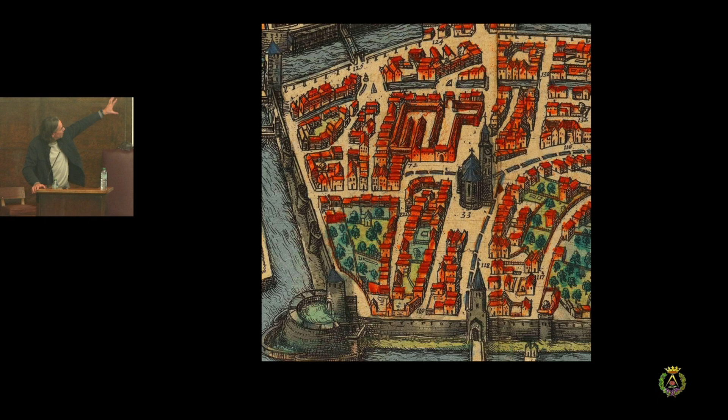Here's the plan, so it's a little like a village in the city, an urban village. You can see in old maps that it used to be there, really old. There's an irregular, organic, typical medieval city, and then suddenly this almost modernistic Siedlung in the middle. It was founded by Jacob Fugger, called the rich guy, sort of the Bill Gates from medieval times. He didn't have any children, but he was very devout Catholic, and so he said, okay, I want to invest and leave a legacy with the Fuggerei.

So the successors were not able to do anything with it, you could say. And now it houses about 150 people, a mix of some elderly and some younger people. They all have this effect, they need a little extra. Some people stay there a bit longer, but on average they live there 7 years, and then they either learn something or they get some help. It's remarkably great, you could say.

So this is the atmosphere. There's the mailman, and well, we were asked to look at it and make a pavilion, but we were also asked to find out if we could repeat it. And what would be the ingredients?

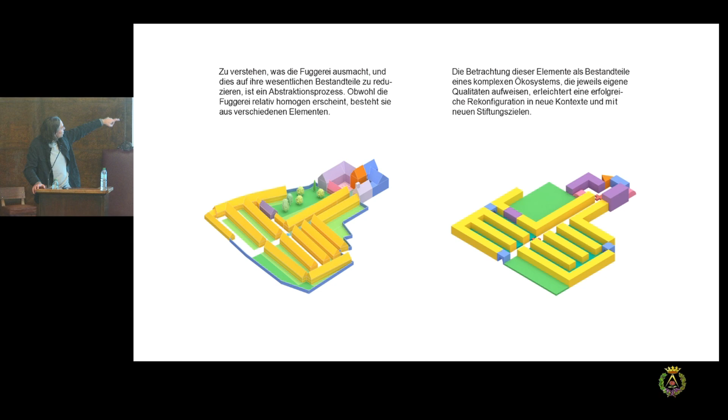You see in yellow the houses, and you have this workshop in purple, there's the chapel and the cafe, and there's the gardens, etc. So then you can basically rebuild it in any other way.

Yeah, so these are some examples of this. It can be like a small suburban context or a more modernistic look. It doesn't mean that it has to look the same way as in Germany. Or it can be a building in the city, just a different vertical configuration. It can be an apartment block with a collective roof, with a workshop and maybe a little spiritual yoga space. So it could be a contemporary version of the Fuggerei.

But what is important is that it is a curated community. So it's not a waiting list and then at a certain moment you get in. They kind of look at it, it's a bit like you have a student house and you live with 10 people. And then you can decide who's the new person that joins the club, instead of somebody just entering.

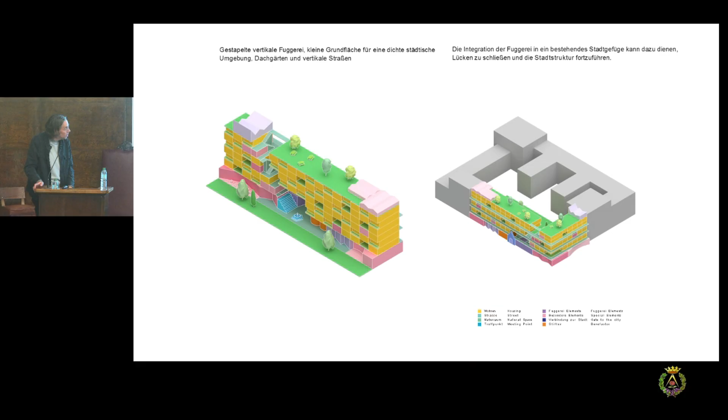And this is, I think, probably an important part. And of course, you have to find a balance for people that are never selected for these student houses or so. But they look for which is a good match, and not everybody gets in. This is maybe part of this recipe. So, etc. You could organize this in a different way.

And this we showed in a pavilion in the city. This was a wooden version of a Fuggerei house with them bending up and looking out to the future. It was also kind of a small attraction that was there for 6 weeks on the market square, where there would be debates and stories, but also people having a good time, to make the Fuggerei more known.

And well, big people came there, like Ursula von der Leyen, who had some links with it. There was also an introduction to the Fuggerei game, so we made a small building box, you could say, where you can make your own little Fuggerei. And there was also a digital version where you could get a score, like how much does it match with the real Fuggerei? Is it a good one? That was fun to do, and it also made it interestingly accessible for other people that normally would not go there.

So you could say, what is the purpose and what is the attraction of shared living? It's not new, it's been there before, maybe forever, and we always somehow like to live in certain communities. That means figuring out how to combine certain functions. There have been examples in the 70s of more hippie-style communities, but currently I think it's more and more relevant to organize in an efficient and maybe more affordable way to live together. You could say, maybe I make my apartment a bit smaller if I have an additional room or other functions that I can share with some other neighbors, and that in the end could be cheaper and more fun.

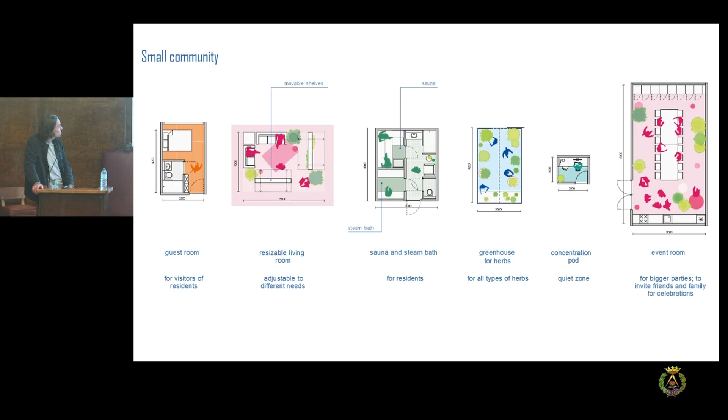So for this you can say, well, we have certain ingredients that we can use, and we made an overview of potential spaces that you could be sharing. You don't need them all, but if your building community is larger, you can collect a lot of them. It can be for certain activities, for dogs, for bicycles, spaces where you meet your neighbors, for gardening, for spiritual healing sessions, or for playgrounds, for working, etc. And this could be a kind of method to discuss this with people, or maybe with your client or your neighbors.

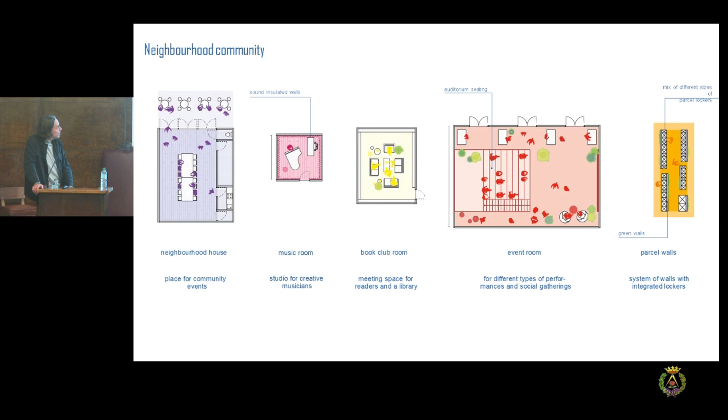So this was, in a way, a toolbox for collective housing, organized in a little book that we did. I'll go quickly because I like to show a lot - what it could be, how you could organize this, some inspirational ideas, offering spaces for the city, or activating the roof. We published that in a small booklet that's now sold out, but we decided last month that it would be better not to print it again, but to offer it for free on our website. So you could have a look at the website and download the booklet.

A little bit of a recap. Ignacio mentioned already that our first building was a housing project for elderly people, for a housing corporation. In 93 we got the commission, and in 97 it was built.

But these kind of commissions are not possible anymore because housing corporations have a different function. They don't offer direct commissions with 100% social housing anymore. It's much more organized as a mixture of market-funded houses, developers, the city, and housing corporations, everybody working together to make a mix of projects, because 100% social housing might cause trouble in the long run. So it's better to mix it up instead of having monofunctional social housing.

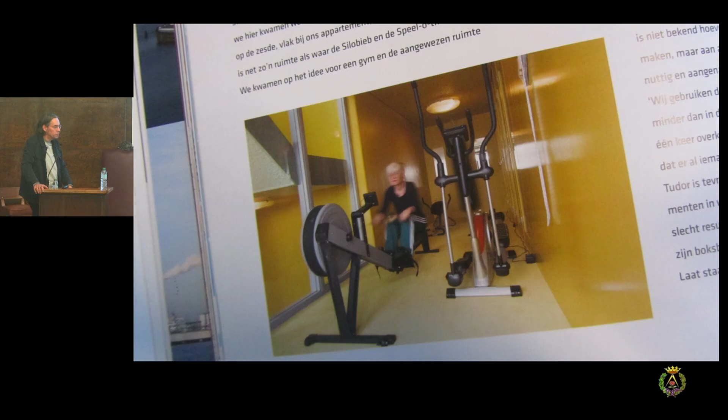So what they did — this was a little corridor for the electricity meters. It wasn't really essential for circulation, but we had to make it because the electricity meters needed to be accessible. It turned into a library or a fitness room. The residents decided, 'oh, let's organize some things for ourselves,' and this is the result. So that was nice to see — wasted space is cool.

In the Parkrand, we tried to create collective spaces by making large buildings with interior spaces that work as a sort of private collective garden. This is the project in Amsterdam that we did, also a mixture of social housing. Here in Madrid, Mirador and Celosía are buildings that started as social housing for sale, but after 10 or more years, probably most have been sold and are not social housing anymore, so it's a bit sad, you could say. The difference with WoZoCo is that it's still social housing after 30 years.

Okay, I'll go quick. The first part of the lecture about the project I'd like to show is about ensembles, about neighborhoods, which I think is a very nice way of building a community — not one building, but a collection of buildings, a kind of urban ensemble. I'd like to show a few of them.

One is in Palma. We finished this a few years ago. I worked together with Guillermo Reynés, a former collaborator. He's from Palma and got us in touch with the Fluxa family, well known for Camper shoes. They wanted to create a similar atmosphere, this kind of Mediterranean living in Palma, a neighborhood they know very well. And can you combine shoes with architecture? This is what we asked ourselves. In a way, we felt a certain attraction to each other.

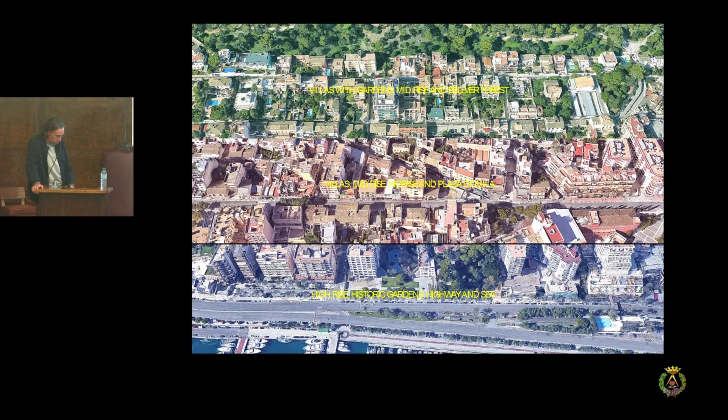And what was nice for us to look at, because it has this really weird and wild collection of buildings. There seemed to be no logic, but it had a very vibrant atmosphere.

There are new planning regulations in Palma. That means that everything that you want to build new has to be 2.5 stories high. I think it was a good idea to reduce the density a bit. But it also meant that everything that is there and higher is certainly very valuable, because if you take it away, you cannot build it back.

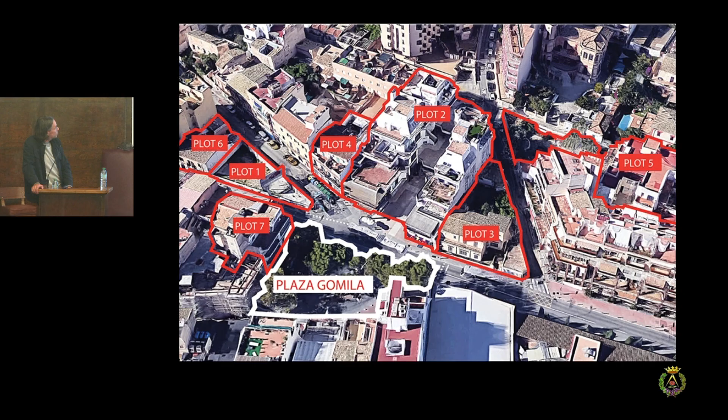So transformations became important for this. What was happening was that certain plots were available, and the family bought them, and we were asked to develop some ideas for that. So these were 7 plots. Some of them are transformations, some of them are new, depending on the context. So what we did, we divided and made a kind of collection, like a collection of shoes, a collection of buildings, different apartment styles.

They're all for rent. It's not the cheapest apartment, but it is in a way offering new typologies to the city and revitalizing the neighborhood.

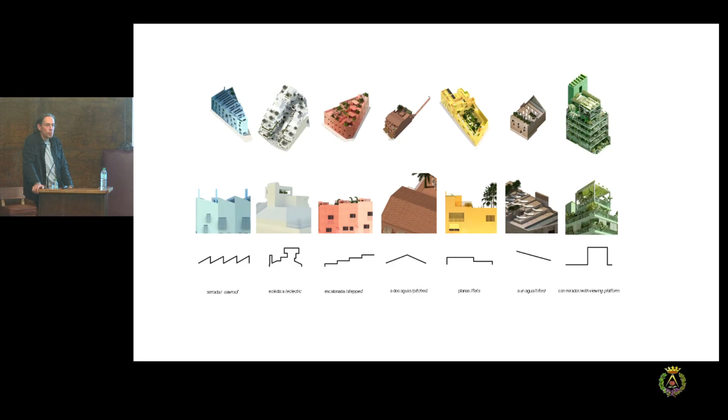In the center, you see this white block, which is a former small shopping center. So our recipe was quite simple. We didn't know how many plots would join, so we started with 5 and it became 7, and now it's actually 9. We said, okay, every plot should have a different color, a different material, and a different typology, and also a different roof. That was what we kind of agreed upon. Not knowing the consequences in the end, but it's a very strong and simple idea, and this led to this collection of quite a wide range of apartment styles.

Some are very experimental, others are more normal. Some are in old buildings, some are completely new, and we gave every plot, every typology, every building a name, a kind of nickname, also to differentiate them from each other. The new ones you could make more strange, because you can start from scratch. The transformations are a little bit limited. You could, but on the other hand, they offer all kinds of other opportunities.

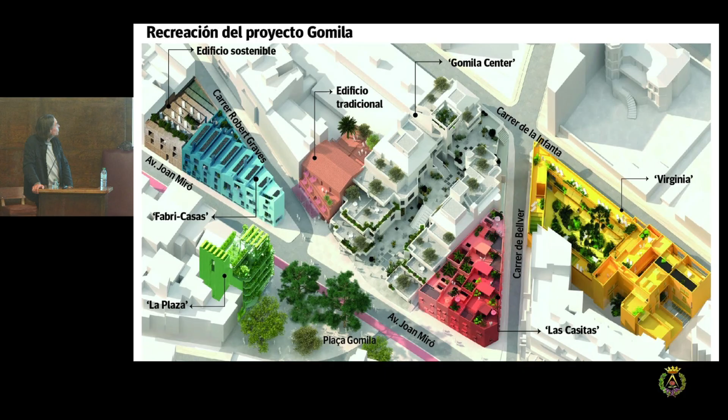So here you see, I'm not going to explain them all in detail, but this was the centerpiece, a building that was really beautifully, almost streamlined, from the 30s I think, even or a bit younger, and it had this beautiful neighborhood atmosphere that we all kind of liked, oh this is cool. Maybe we should try to get something back like this.

But when we started, it looked like this. It was not the coziest place in the city. It was a bit dangerous at night. And of course, when you see this, you can understand a bit why.

But we kept the structure. Most of the tenants could go out. Some people actually owned an apartment on top, and they didn't want to leave, so they still live there, and then we had to work around them. But they in the end have a good deal, I think.

The ground floor became a cafe and an office, and some of the apartments have large outdoor decks. And you see as well this cassette structure. This is quite an interesting structure that was there. It was used on one of the first occasions, this mushroom deck floor.

So in a way we brought it back to the original atmosphere, in the sense that it has this collective space where you can hang out, people can work, and we added a new staircase that is a shortcut to the street on top, so it's also a little passage. At night it's closed off, but during the day it's open. Here you see that, and our interventions are quite strategic, but not that much.

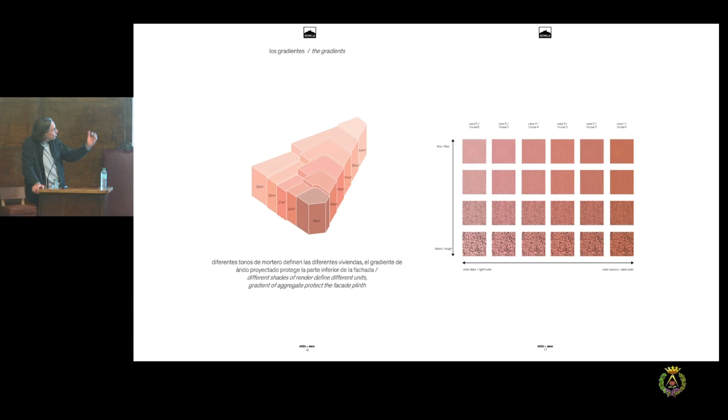This idea meant that the roof became important, so every house has a roof deck, every house has a front door, and there's also a little basement to optimize the space. In summer when it's hot, the basement has a nice cooling effect, working as passive cooling for the house.

So that's the story. These are houses for rent, so the kitchens are red, and you cannot change the kitchen, so that's why they are like this. But it also gives a certain atmosphere.

This is that one, and the other one we call the Fabri-Casas, more like small factories inspired by the ones that used to be there in the area. These are also houses with their own front door.

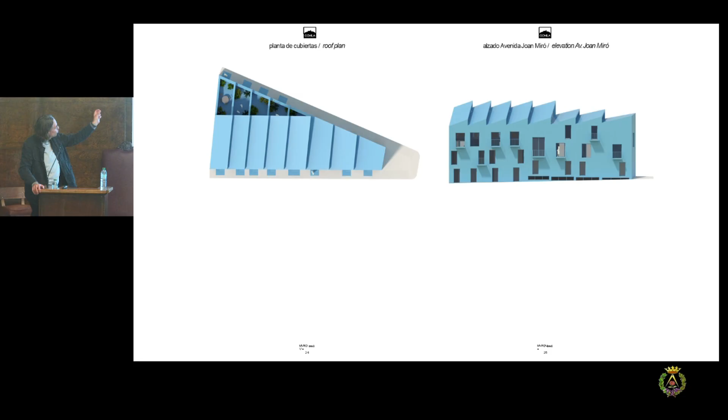They had to be more or less the same size, and the plot was like a triangle, so the deeper the plot, the more narrow the house. And again, the more square one was at the corner. It was inspired by this shoe.

So there was no discussion anymore about the shape, but it was also a super interesting exercise. There were some discussions about whether you can make a house 2.20 meters wide, and we kind of got the benefit of the doubt. In the end, it turned out to be a really nice house.

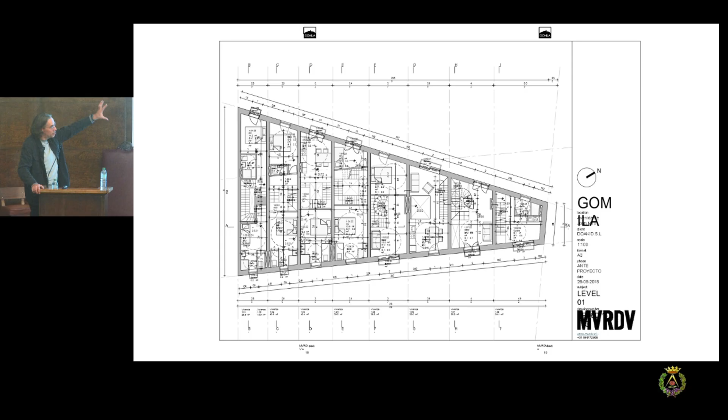So it was complicated to get everything organized. You see the turning circles for the wheelchairs. I love this plan because you see a lot of staircases. It's not the most efficient house, but it is a fun apartment.

Everybody has an outdoor space, some on the roof. The more narrow ones have a loggia or a balcony. The two roads on the side are split in different heights.

We made also this idea, similar to the other plot, that the colors change depending on the position of the house. The closer to the white block in the middle, the lighter it is, and further away, the darker. These tiles were developed with Huguette from Mallorca, who made a really nice sampling, and here you see the results.

What's nice to show is that, in a way, it offers a typology where people can live together who are not always a family. So there could be three people living independently with their own bathroom, sharing their living room and workspace.

It can also be a family with 3 bedrooms, or 2 bedrooms for the children and 1 for the parents. You could sublet one unit because it has 2 entrances, so there are all kinds of ways to use this apartment.

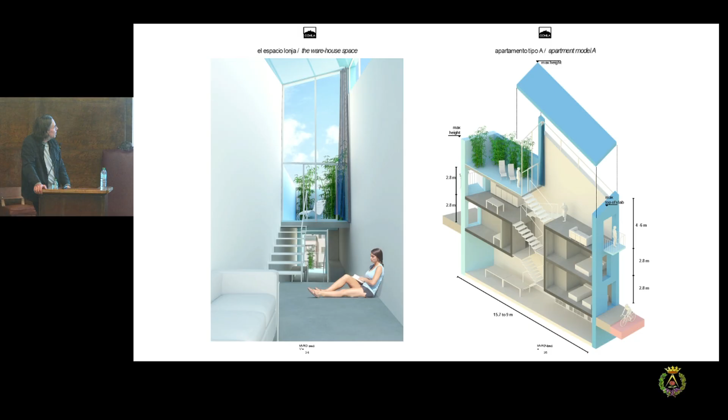And you have this nice roof deck on top, and then you go down to the kitchen. Every bedroom, inspired by capsule hotels, has the bathroom on the facade, so you have your little kind of hotel room in your house. That was the concept for that one.

So ultimately, we're at the moment developing 2 more, but these will be transformation projects. This one was also added—it was a supermarket that was there.

The supermarket owner knew everybody from the neighborhood, so they made a deal with him that he could stay and have a reasonable rent. He didn't have to leave, but they only wanted one thing: he had to change his signage, and then he could continue operating his supermarket. That deal was accepted, and you can still have the supermarket with part of the graphic corporate identity from the neighborhood.

We gave them the brown color from the roof tiles that was there already, and then we added that on the facade.

So that's the story, and I'd like to move on to the Netherlands, which is a similar project—7 houses in Eindhoven, where I just started as a professor at the university. It was an interesting example of how projects happen in the Netherlands. This was a competition between developers: every developer selects one or two architects to make a proposal together, which has to be presented to the city and to the neighborhood. It also has a financial component—there's a minimum offer for the land—but it also has a quality component.

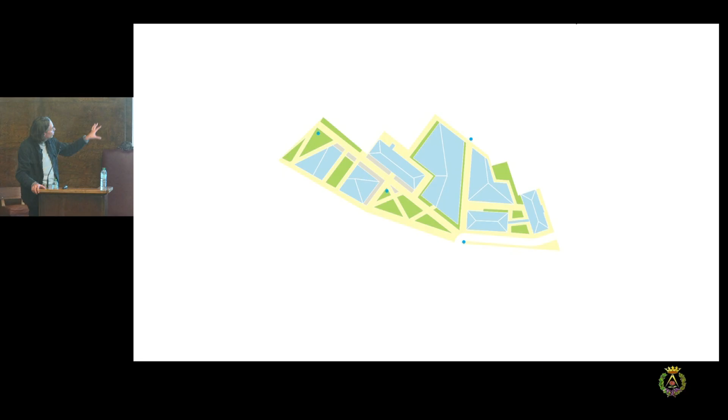That means this was the patchwork that we created out of the connections in the city - some neighborhood plazas, a little pocket parks, and a couple of plots for buildings, and some of these buildings are existing ones. And this is then the ground floor that we made out of it.

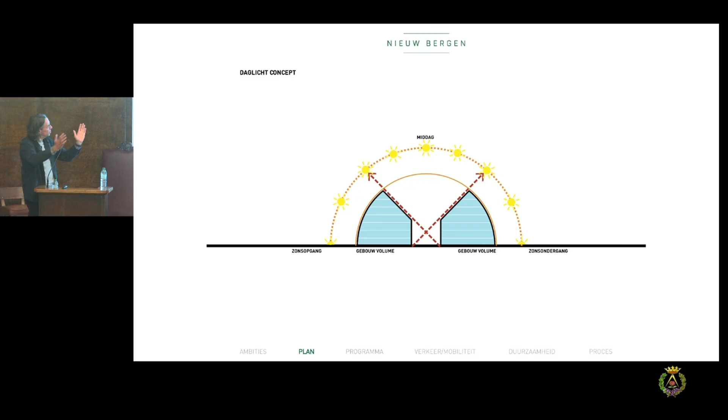So what we did in terms of the section, in order to have this density on the spot, we said let's follow this rule. We like this system a lot, where you have a relation between the width of the street and the height of the building, so the streets are somehow lit. In the Netherlands, that's kind of nice - you don't need that much shadow, you don't have that much sun, especially at this time of year. And if you have an irregular pattern, you get a very strange and weird outcome for the volumes.

So we really followed this strictly, though not always consequently - there was a main road on the right that's a bit wider, and then suddenly we could make a semi-high-rise near the existing buildings. Where it was more narrow, the buildings would be lower. And this story landed very well, because everybody said, well, this is really Eindhoven. This really comes from the ground up. It is really fitting into context.

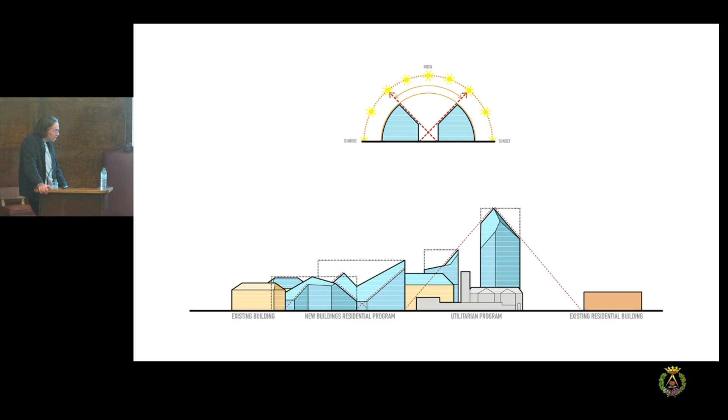It has this nice combination from traditional to modern, which they liked a lot. They think it's cozy and traditional in Eindhoven, but also super innovative - there's a design academy and lots of cool designers, and we have the tech industry, so it's all very modern as well. So somehow this landed on the good spot.

And this trick we have done before. This is in Bordeaux, Quai de Quéry, a former industrial zone as well, where we made a master plan based on similar principles. Here we made a collective housing project in a white color to reduce urban heating, with a nice collective green garden in the middle.

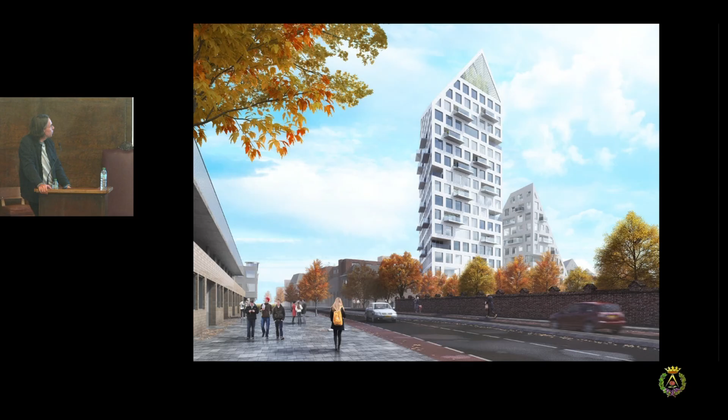And this principle we kind of optimized, made it slightly different. Here we added green on the roof and have solar panels. So that means you have the cozy streets, you have the high towers, but they're all in one kind of collective system. So here's the development that we did.

On one side you see a lot of green, on the northern side, and on the southern side you have the solar panels, which are collectively used. So you might have a certain house with a different ratio - the tower is quite high but has a small roof, while another big building that's lower has a big roof, so the energy from the lower building can be used in the higher building. So it's kind of a collective project in that respect as well.

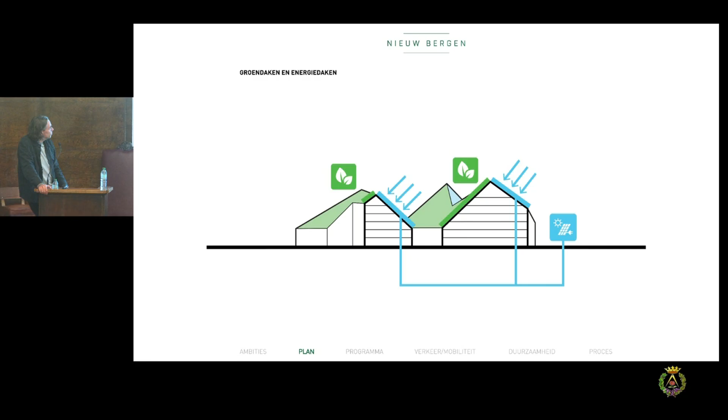Same for the green, same for the water. So that's the principle - it is connected by parking. So on one hand it's 7 buildings, but on the other hand it's one big building.

Besides the green, we also added a gradient facade, which connected the historical older buildings with the modern building. It was kind of darker, browner, and rougher in the older part, and smoother and lighter at the top. So each building follows this rule - the bigger the building, the smoother and lighter the facade.

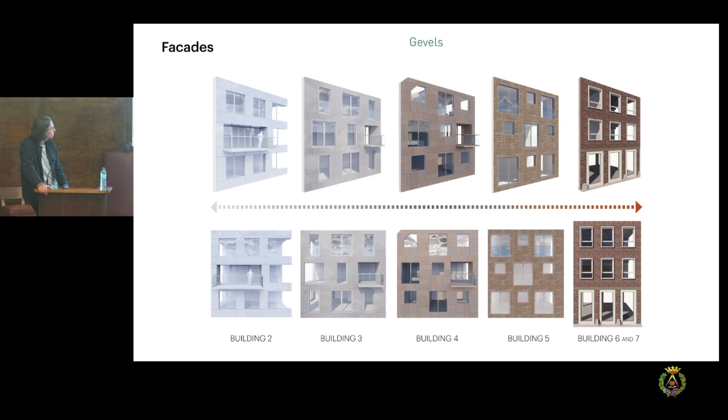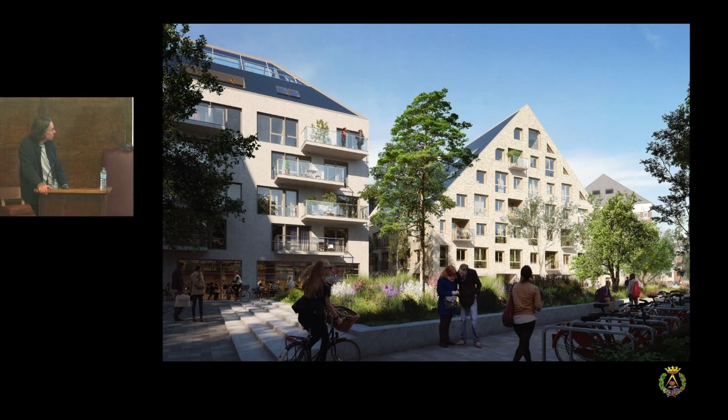The ones I showed before are compact units, small studios. The third building is social housing. The fourth building is mid-rental. Then you have two high-rises that are more expensive, rental and a sales apartment. So for every category there is something, and there's one super expensive apartment we think will probably be bought by some soccer player, we don't know. They want to finish it first, but it actually helps pay for the smaller and cheaper apartments - this is all part of the whole balance.

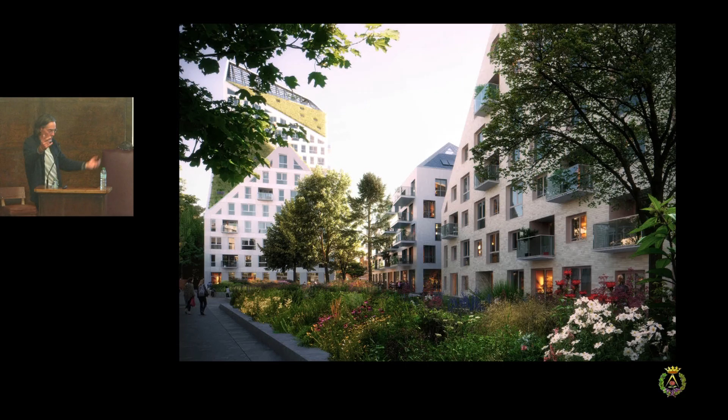Some collective small spaces in the middle, the new route, which is a little bit more slowed down. And this is the overview of the project in Eindhoven. It has these collective spaces on the roof for roof gardens and meetings, and on the higher ones it's a private one, but it sort of pays for some other spaces.

I like to, if you have time, yes. We started a bit later.

Some more about vertical ensembles—how to live together in a vertical building. One of our little projects in Rotterdam is a small roof extension, for a family that didn't want to move out of the city, but the only way was up. So they created an extension of the house with bedrooms for the children on top of their company, and it gained a lot of attention because it was remarkable and a model we all kind of liked.

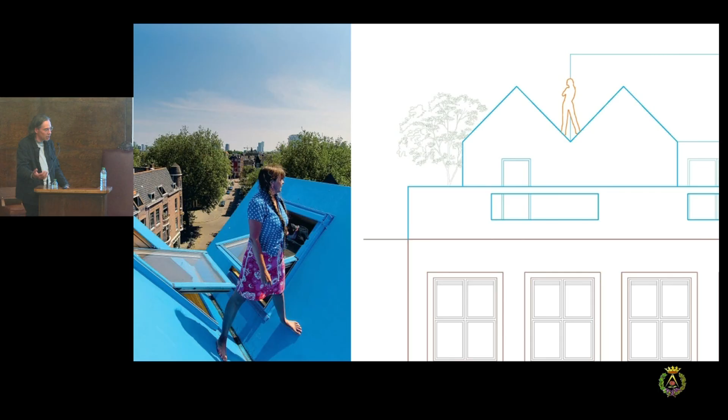So you have your house and you make your holiday house on top of your own house—this is what it looked like and felt like. The building would be invisible when the weather is great and the sky is blue. When the weather is grey, the building kind of lights up the sky of Rotterdam.

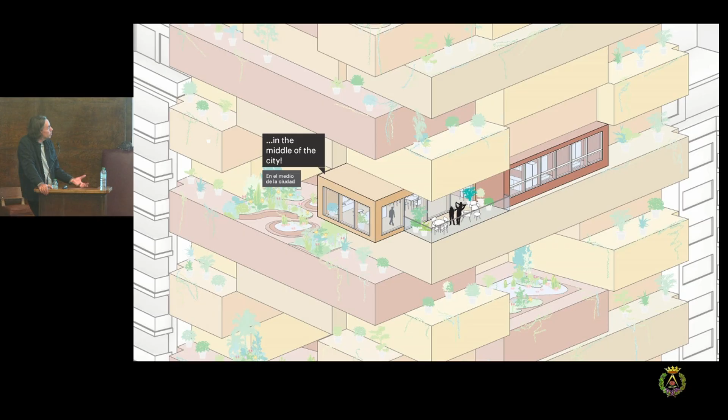This idea of living in the city while having the feeling of living in the countryside was the inspiration for the project we're doing in Uruguay, Montevideo. You get the quality of a freestanding house with a garden or balcony near the park or near nature, but you're actually in the middle of the city. That's what many people are longing for.

We developed this principle in an infill situation in Biarritz, Montevideo, a neighborhood just off the center but very close to the river, or ocean—Rio de la Plata. It was an interesting case for us. It's a really nice place, Montevideo.

It has these green spaces, and also high density urban qualities—reminds a bit of Madrid here and there. And this is the location.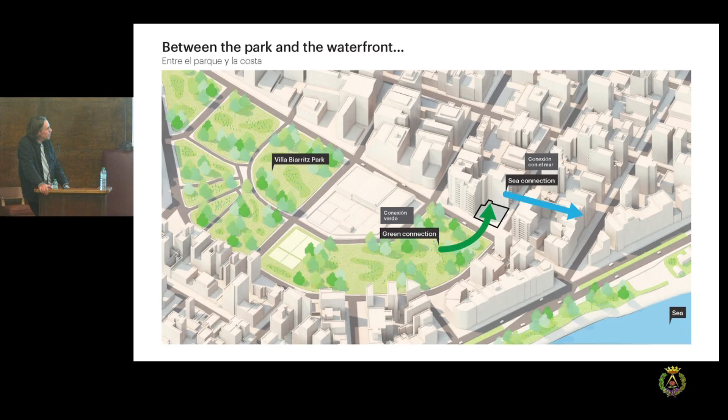Near the park, one of the last empty plots, partly because of the sun orientation, but it has this really nice location near the sea. We thought it would be interesting to test if we could work out this idea of city villas with gardens in the sky.

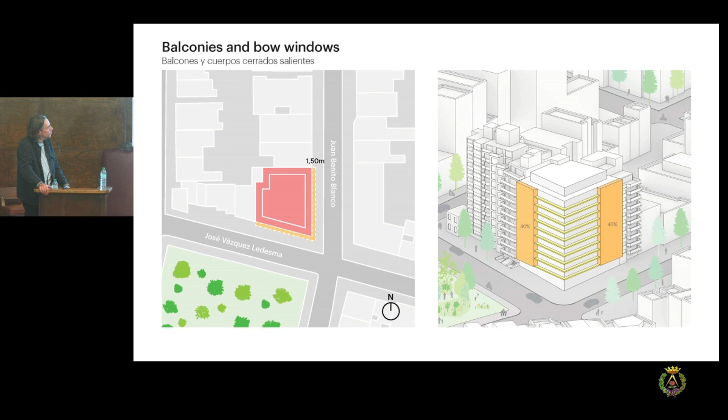Here you see the corner plots—you could basically build something like this; this was allowed, with balconies and bay windows. We followed that more or less, but we also realized the difficulty of the plot: you'd have a large dark zone, which would not be easy for the layout of the apartments.

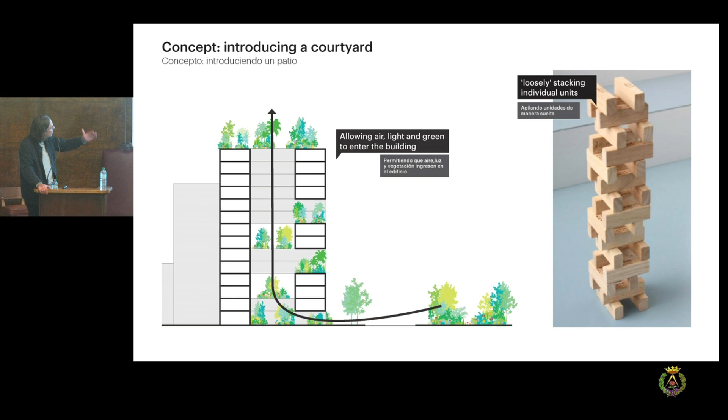So we asked to find out if we could try it slightly differently. Instead of this, we could make a mini courtyard that introduces light in the middle, but that meant we had to go up higher. That could create a vertical shaft, like a green shaft through the building, leading to a more airy block—similar to Celosía here in Madrid, but in a different way.

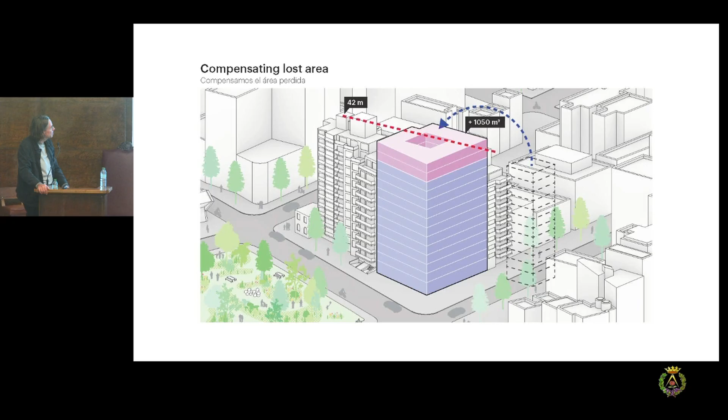So here's the base volume, and we said, okay, we'd like to extend it a bit. We take out the square meters, put them on top, and go more or less to the top of the lift boxes of the neighboring buildings—outside of the zoning, but still modest in a certain way. This is what we presented to the city.

So we have the collective sky gardens—everybody has a nice balcony. It has a more airy block, and it sort of matches the neighborhood, but it's not officially 100% within the zoning law.

This was then luckily accepted by the city, even though it meant less square meters could be built—400 square meters less than the maximum allowed. Here is the ground floor with a nice restaurant and commercial space, a gym for the residents, and this is how it looks.

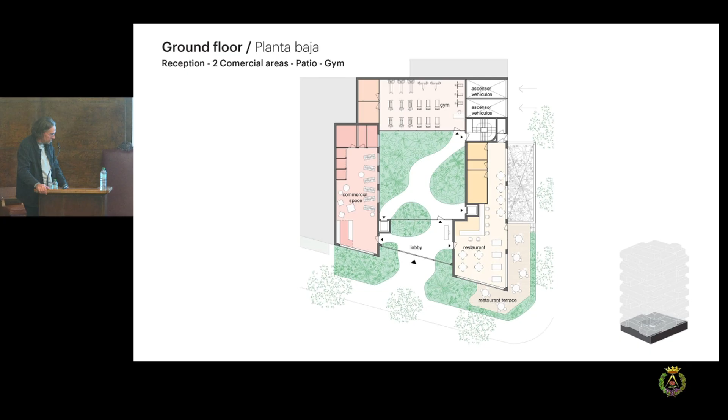Looking up, you have more or less 3 apartments per floor, and all of them have a window. They're also the ones in the more difficult part, with a look outside through the halls of the collective gardens.

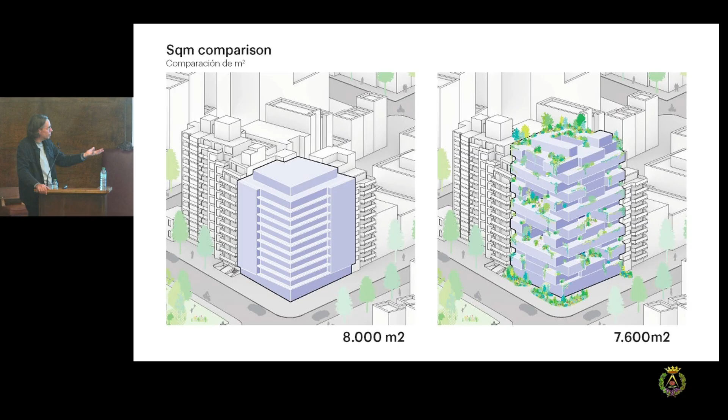I'll go quickly, but you can look it up on the website. Here you see the results. We could basically make 8,000, but we presented a scheme that's slightly less, slightly higher, with more air and more quality. This was approved, so we're on site at the moment. We took some inspiration from the neighboring buildings, and in a couple of years you'll see the result.

Another urban tower in a different part of the world, but dealing with similar issues: loneliness, urban heating, affordability, and how to make a nice neighborhood. We have people in our office from Taiwan, and we've done some work there for a few years now, a really nice collaboration.

Taichung has a dream, and this was written into the regulations of the new planning code: you have to bring nature back into the city in some way, and bring people back together. This led to a series of tough regulations that you have to follow.

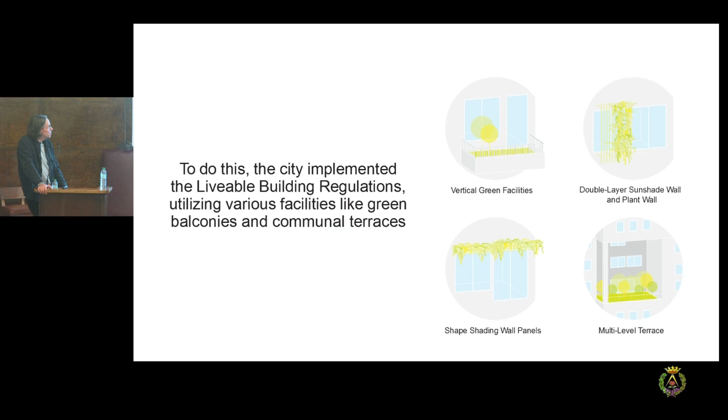You have to bring green into the city, have collective spaces, multi-level terraces as they call them, shading wall panels. It's a kind of guidebook. It led to some not-too-nice buildings, but the ideas are very good, and we took this very seriously, asking how we can interpret this in the best possible way to create a green and happy city. That's what we'd all like.

So the Kucha, that's the name of the plot. The building has to be demolished because of differences in earthquake regulations. Many buildings don't fulfill the new earthquake regulations, and there were terrible accidents in recent earthquakes where buildings toppled over. So many of these buildings are being redeveloped, and transformation is not a possibility.

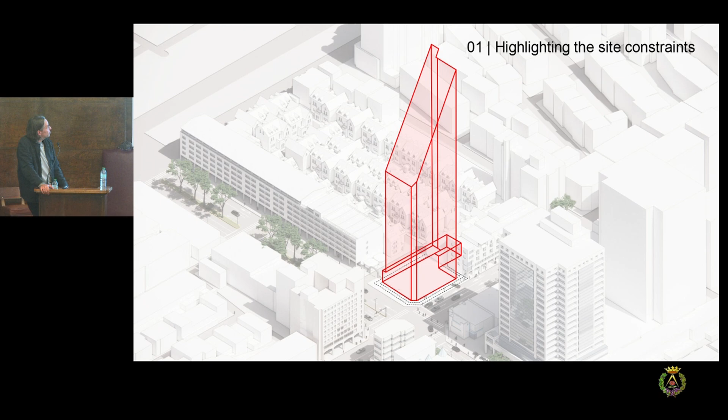So what to do? This is the potential of the site, and that's the density you could make. It's a very straightforward commission: apartments, some commercial on the ground floor, but following the regulation, we also have to have commercial at the collective spaces. This is a given — not because we like it, but because you have to do it.

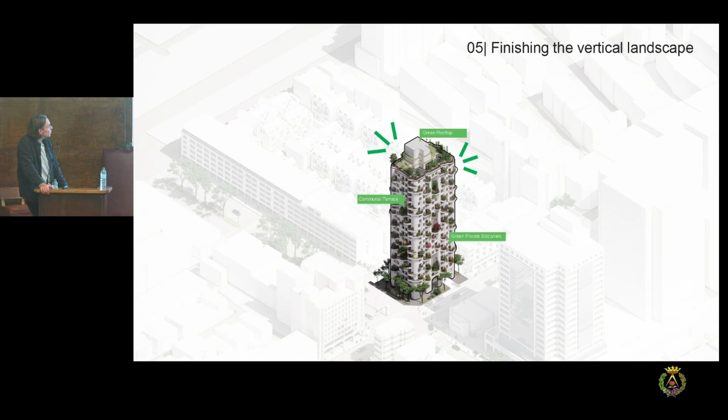Communal terraces, accessible rooftop, an attractive plinth, private green spaces, balconies, and green added on the facade. Part of it is also how you keep that alive — they're very strict on maintenance, having a green rooftop — and this could be the result.

In a way, it's inspired by a project we did with Vicente Guallart in Sociopolis in Valencia a long time ago, which almost started construction, then the crisis came and it was over. It also had a Spanish touch, using the trencadis technique.

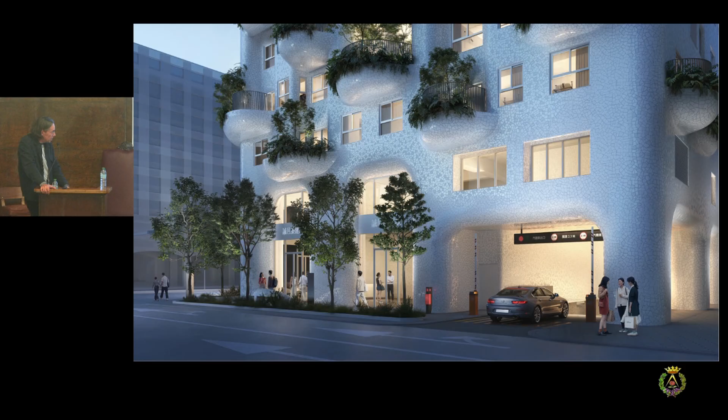So here you see that first idea. There's a small parking area, the lobby and the cafe, and everybody has a nice balcony, with a couple of different recipes for that. You have the mini balconies that are just plants, a small balcony where you can sit with a bit of green, and then the bigger balconies that are collective, accessible via the corridor.

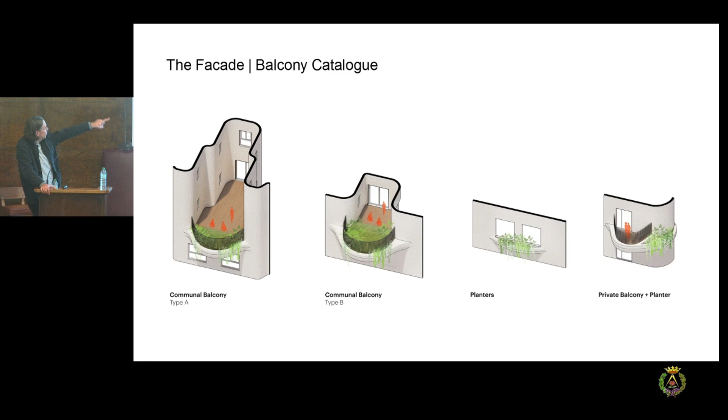So here you see them. Every number of floors, you have to have a communal balcony — two types, a big one and a small one — and then you have the planters and the private balconies.

They could go around the corner. So we developed a catalog of the balconies, added them to the facade, and this has now got planning permission, and we're building a mock-up for the city and developing a gardening concept for the plants.

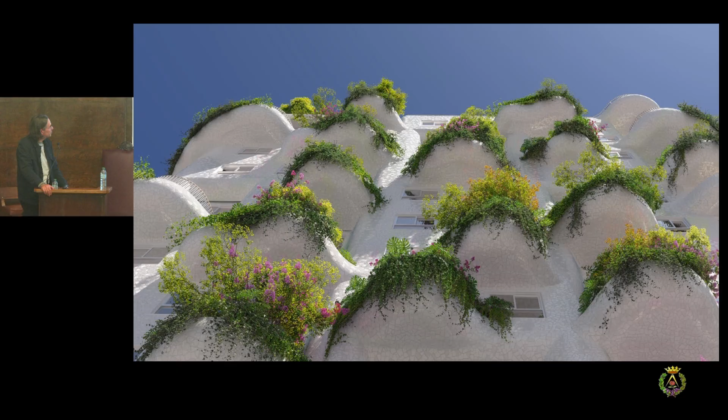Let's see how it works. Hopefully this will be the result, we'll have to see that in a couple of years, but that's the intention. Here as well we use white because of the urban heat effect. The white building reflects the heat, doesn't absorb it, and makes the city less hot, and the plants as well.

One more to go. I think it's the Sax in Rotterdam, a project we've been working on for 8 years, and it also shows a bit the difficulty of making housing in the Netherlands.

It's really on a great spot. If you've been to Rotterdam, they have the Erasmus Bridge that developed a new neighborhood on the south bank of Rotterdam, where there used to be a lot of harbor activities. This took 30 years. When we started our office, this was kind of an empty spot, but now it's becoming a really nice place.

There's also a new museum by MAD Architects being built over there, but it has this history of, let's say, migration as well, because this was the place where the boats from Europe went to America. So it's very much about trading. It has this marine link, and the harbor moved out.

Some buildings were kept, the bridge was developed, and then it became sort of the new high-rise zone for Rotterdam. Rotterdam is the high-rise city of the Netherlands, so here the first experiments were done with high-rises. The master plan, this is the concept.

So you have this small and narrow jetty. It's the densest place in the Netherlands, because you have the water around it, but it is really full of towers, and there's more coming. Rotterdam is developing quite a lot, you see a lot of construction. It still is an issue of housing, but you see that this is really high density apartments. Not all of them are fancy, but it is a mixed neighborhood.

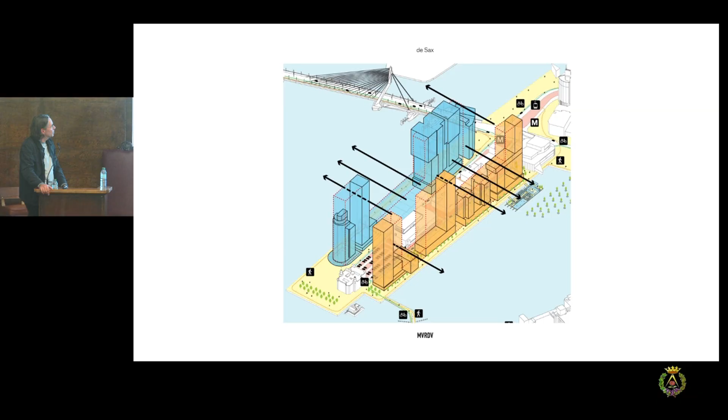And we were selected for a competition for one of the last residential towers on the pier. It was a concept developed by our client. They wanted to connect two plots in one and create a bridge between them, and they dubbed it the Sax, this is the name they gave to it.

We thought it would be an interesting typology, because there were towers with a plinth, type A. There was the famous Rotterdam building from OMA, which is in a way a vertical city, with offices, hotel, and apartments. It's also a super fat block, a really nice typology.

We thought it would be interesting to make something in between. In the beginning, part of the project was a hotel that was in the golden bar in the middle. That was taken out, but you could see it was a small plot with a lot of apartments.

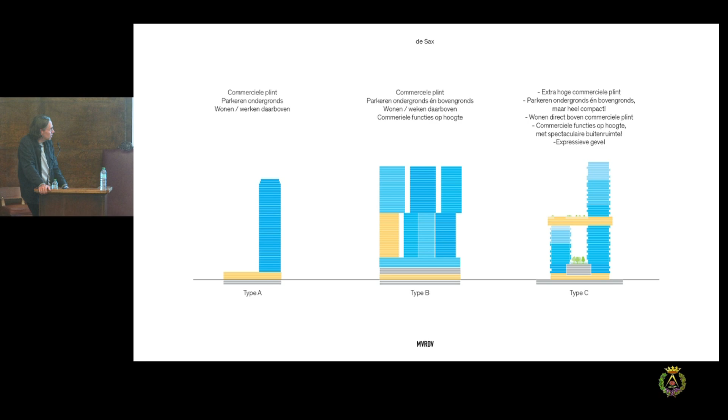The ambitions—they had super high ambitions. They wanted to do the best high-rise in the world. It should be amazing, it should be fast to build, it has mixed use, but rational. So they wanted everything, and that's why there was this tough competition.

We thought, okay, the buildings on the pier are done by different architects, that was one of the conditions. None of the architects in the competition had built a tower in Rotterdam. There are some nice examples of different architects—SANAA did one, Renzo Piano, Foster, Mecanoo. So they all did their own little beautiful thing, or not that little. Each tower had their own facade.

We thought, okay, which one is missing? So we have to do something that is not there. So we thought, okay, silver and gold, it's not there. It actually happens to be the colors of the saxophone, so that's why we thought this could be a theme.

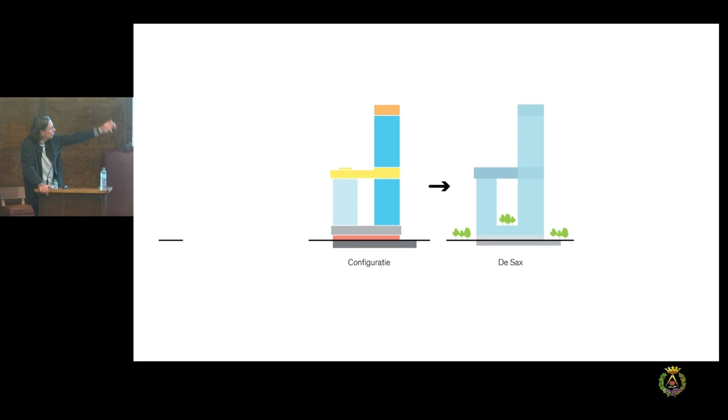By connecting the two towers like this, not like the configuration in the program, but melting them together into one kind of movement, the shape was there. So that was the story. It's about 180 meters high, and it has this bridge.

In the beginning it was a hotel, but now it is special apartments. There's a collective roof deck, about 100 meters high, and a pocket park between the towers. There are different living rooms for the residents, and on the ground floor there are public amenities.

The city, of course, was used to high-rises. They have a lot of experience in Rotterdam, and they said the first generation was okay, but they also saw a lot of problems on the ground floor, so the streetscape was not good. What was really important was the eye line. The skyline is nice, but for them the eye line was even more important.

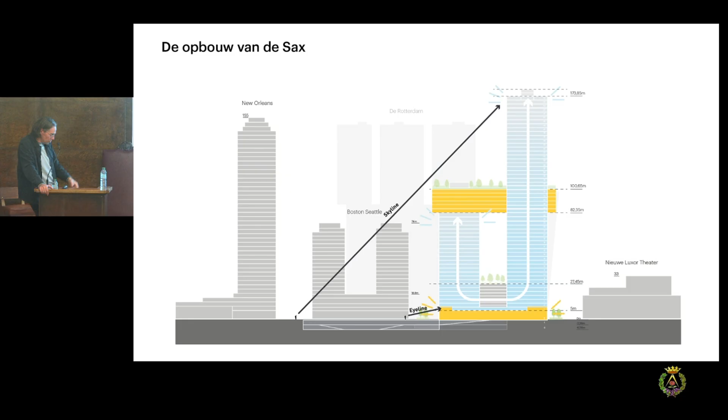So what do I see on ground level? What do I see when I walk past the building? And this was on a really small plot—you can see the Markthal was a similar scale building. This is about a FAR of 7.4, and the Sax is about 5 times denser on a smaller plot.

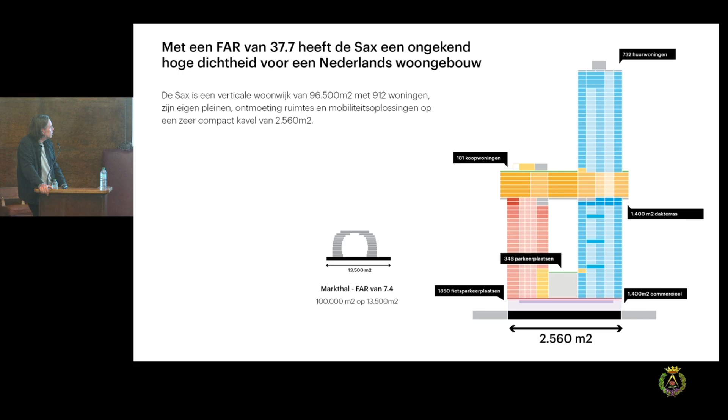So that was one of the challenges. We had to organize the parking—there was an existing entrance to the garage next door. There were a lot of demands on what had to be visible on the ground floor, and there were structural issues. Everybody wanted to have something, and then it was really a nightmare. But we managed to pull it off.

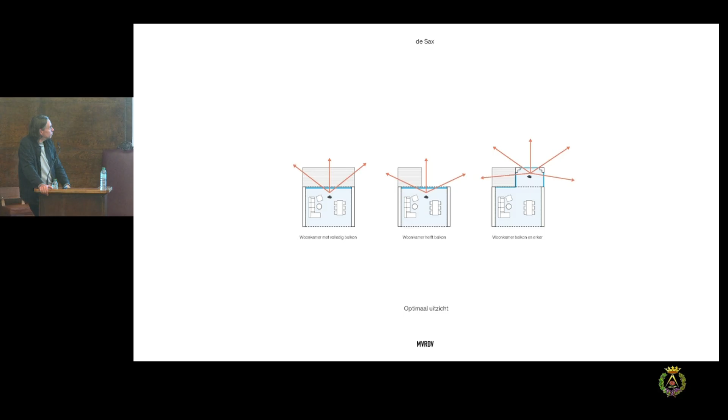When you walk around, you see balconies, people sitting on balconies. When you go to Amsterdam or other cities, we don't see that. Living on a beautiful spot, we thought it would be nice not to just have a balcony, but also a bay window—the combination of the bay window and the balcony was the key for us, giving a better view and an outdoor space. That was the additional thing we could bring to the table. If you make a window, you have a great view, everybody likes that, that's easy. But the topic was: we have an efficient building, and then we add this facade of balconies and bay windows, creating a beautiful, green, nice community. Yeah, that was the story.

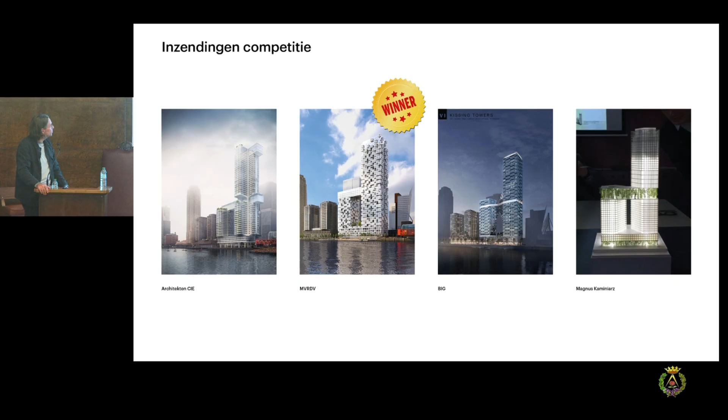That's how the project looked when we won the competition against architect BIG and German architect Magnus Kaminiarz. Everybody said, yeah, great, let's go for it. But then crisis, COVID, construction prices went up—all the things that could go wrong went wrong, basically. The hotel market collapsed, so this project was almost dead.

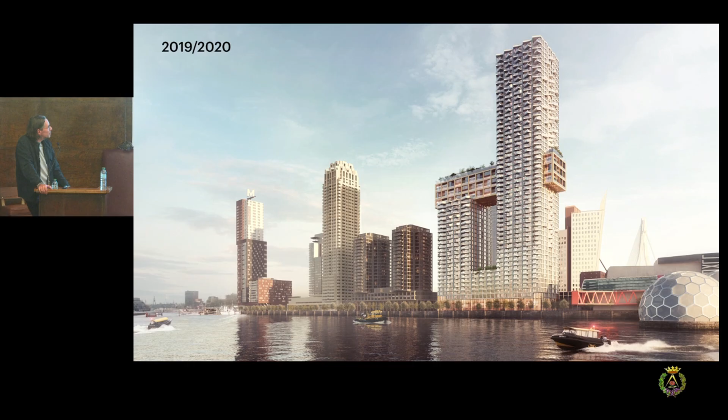But step by step, we managed to optimize it. It was not easy—here you see the optimization of the facade. The building got a bit higher. Then the contractor came in and said you have to make it a bit easier to build. We wanted an efficient construction method, so the final result is different, but I think it still has this more efficient construction method.

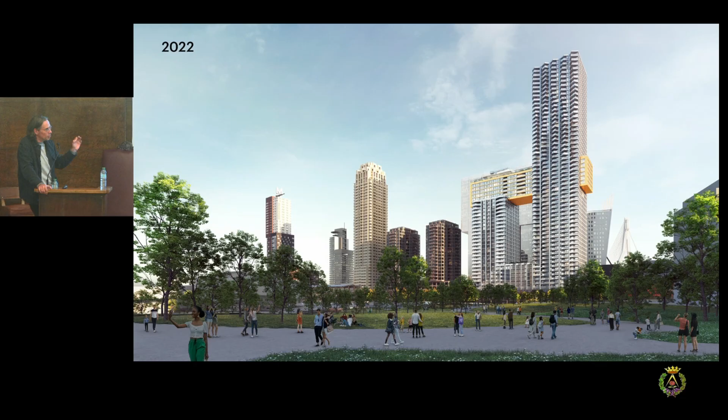It has much more apartments—we started with 450 and now it's 912. There's no hotel, but there are studios; 80% is for the rental market and 50% of the building is affordable rent. That was the demand of the city. During this whole process they said, okay, you can make a building higher, but you have to make more affordable rent—then you're allowed to make more square meters. All these kinds of things took time, but we reached an agreement and started the permission process.

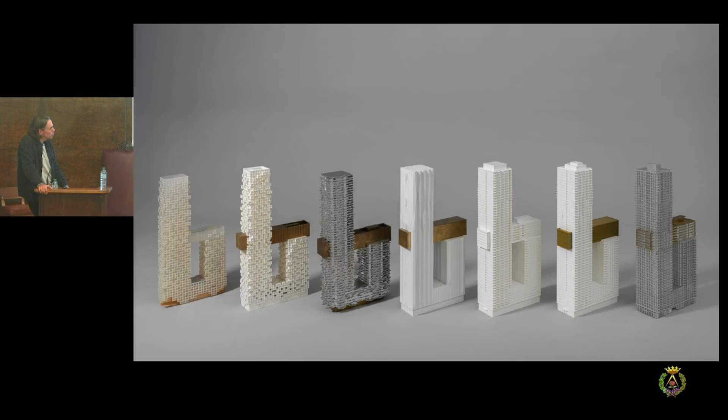Which again brought a lot of people complaining—that took another half year, 1.5 years, of people living next door saying not in my backyard, etc. Here you see the development of the project. It's still the same, but it's different. I think it somehow shows the movement, the sign of the times that happened from the competition to the next stage. So here you see the result—you still have the bay window, but it's slightly different, and the balcony.

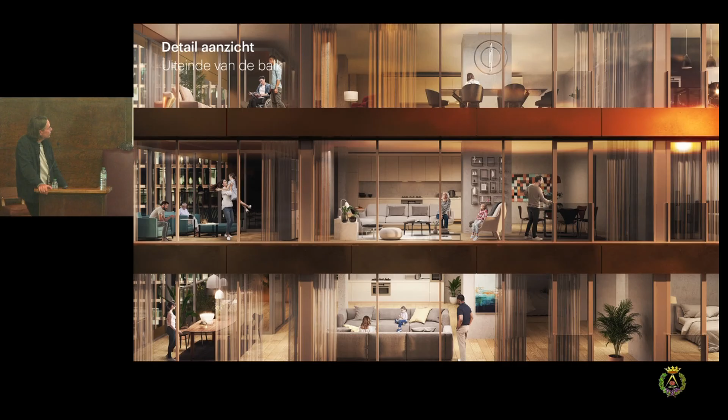And you have this combination of different apartments with a certain neighborhood feeling, but it's a little bit less crazy. Here are some pictures of that. We have the beam and the roof deck, with special apartments in the middle. These are more the high-end apartments in the beam, and the mass of the building is sold to a pension fund. This is how it looks on the ground floor.

Super important and complicated to solve was the whole plinth, how the building would land, and having access to the garage. They wanted a lot of bicycles, so there's almost 3,000 bicycle stands but less parking. So the city accepted a lower parking ratio, but with more bicycles.

So this was, you have the incredible bicycle floor, and we also organized a mechanical parking robot for the residents. So there's public parking below, and residential parking where you park your car downstairs and then it goes into the machine. Getting that permit was also terrible, because they have electric cars. What happens when the electric car gets on fire, etc. All these issues we had to settle, but it somehow worked out.

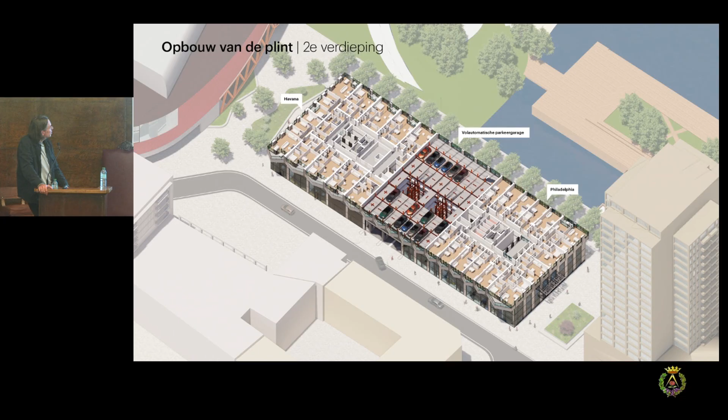Here you see the little neighborhood square between the towers, with a living room, collective spaces. There are not a lot of collective spaces. I personally would have liked to have more, but this was kind of the balance, the affordability, in the sense of making the project work.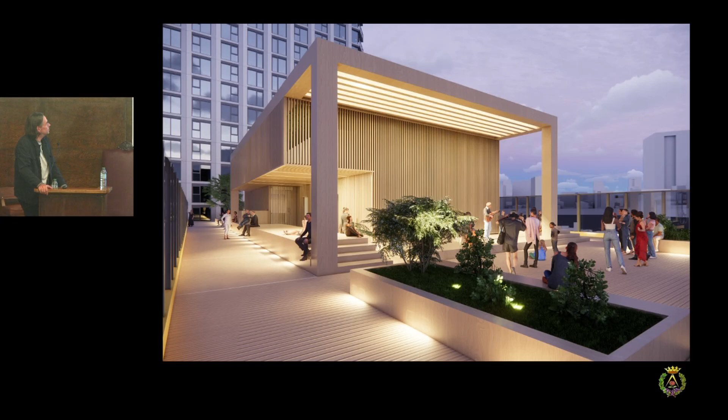But on top we have this large roof deck with a small pavilion, and this is, I think, quite a remarkable feat that you have from the 100 meter. But again, this was not public, so this is the sacrifice we have to give. In the original design, it was a public roof deck.

And the result is there in Rotterdam. It takes 4 years to build, so in 2030 it will be finished, 4.5 years. And the construction started last month. So, to be continued. Do we have time?

I have one more, because I like to show this was the secret project. It's linked to the Master of Collective Housing. I will show the project in India. 5 years ago we did a workshop, Ignacio and me. One of the participants was Prajakta Gavde, a student from India, and she joined our office. We didn't have that much work in India at the time, but after 5 years and a lot of experience, now she's the project architect of the project in India that I'd like to show you.

It's called Future Towers. Before I show the project, I have to give a little bit of history. We started this project because we thought it was interesting to work on large-scale buildings in the developing world, because they are the least published size of architectural projects. The most square meters are built by buildings that never get published, and most publications show small projects like little villas or beautiful interiors. So that will be interesting.

And these projects are in India. They're built in so-called townships. They're not the same as the Indian or South African township, but they're basically little cities built by developers that are plugged into the public system of the city. In this case, in Pune.

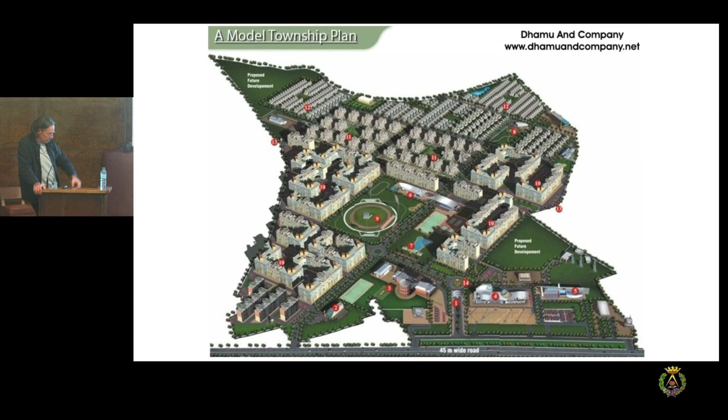Our first meeting was with this guy, Mr. Deshpande. He was the entrepreneur who developed the city. He's super proud. Now his son is working with us on the second edition of the building.

What was cool to see is that they started with the park. So they didn't start with the buildings, but they started with green space. And then the park is growing, it's super nice now, and there's a lot of people living around it.

We were asked to develop a master plan for the spine, the so-called pipeline road. You see there's a lot of different typologies, some low-rise, some high-rise. This appendix is a sort of shopping mall, where you enter. It's not 100% gated, but it is a bit controlled. It's super successful because it offers a more relaxed lifestyle than the chaotic lifestyle in the normal city of Pune.

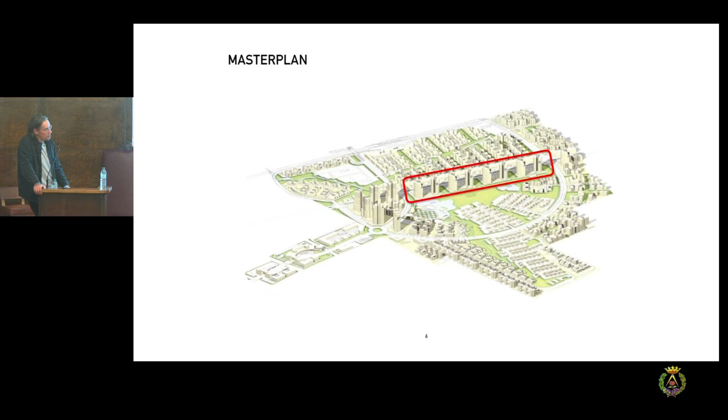So there was a height limit of 100, super high density. We tested out typical Indian towers, and that would mean we had to make 60 towers in the master plan. We thought it would be easier to do a system like this with fewer towers, fewer cores, which are expensive, so it's not easy. We based this grid on the fire escape rules, so the biggest distance between the cores is 30, so 2 times 30 is 60.

So that was the grid. And out of this grid we created a system of towers.

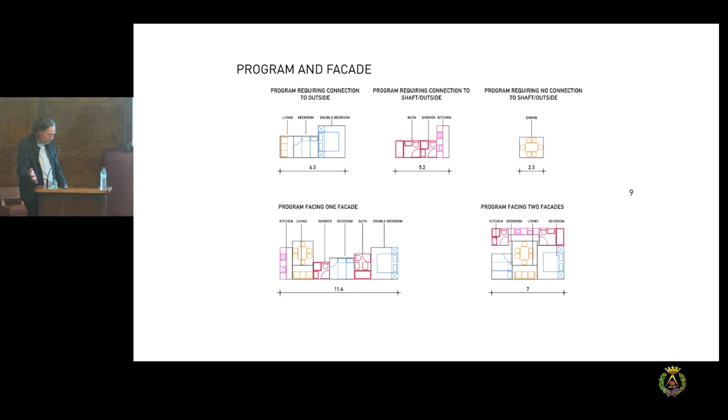We then started looking into Indian housing, which is very specific. They want natural ventilation in every room, also in the toilet. So if you put all these for a normal apartment next to each other, you would need a very long facade, 11 meters. You have typical units with a living room, bedroom, bathroom, everybody needs a window. But if you flip it, you have a compact unit with a big shaft, and the shaft is then an outdoor facade without a view.

So this was the typical Indian recipe. There's no mechanical ventilation in the building, but everybody has its own little air conditioning. It's also a kind of simplification.

There were very specific rules about how the layouts had to be done, so I won't bother you too much with this. But we created this system where our client could basically plug and play with the units as they liked, maybe bigger units to the park, smaller units to the roads. That led to a typology where you'd have a mixture of units on one corridor, where most Indian houses have one typology per tower. So it would already be a huge difference.

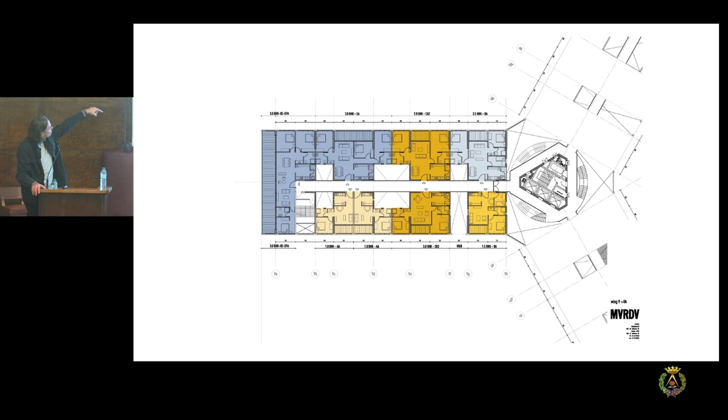And then on the corners we would have large panorama terrace roof decks. So that's the typical floor plan.

This building you might have seen. It's been built about 10 years ago. It has a lot of collective spaces in the middle, so it is really a vertical city. Every little pocket garden has a theme, for girls, for boys, for younger, for older, for golf, for coffee, for tea, for yoga, whatever you like, it's all there.

Because there are so many units, so many functions could be added. It's a huge building, but it also has a big swimming pool 50 meters long, all kinds of tennis courts, all the luxury stuff you like in an affordable, relatively affordable housing. This is mid-income housing. Construction costs were $250 per square meter at the time.

So there was only one recipe for the facade, just stucco, cement stucco. This was the sales site. The apartments were for sale, with typical floor plans and so-called terrace apartments.

Here you see when the building was opened, there were small celebrations for the gods, so to say, to get good luck. So this is a standard apartment, and here you have one of the terrace apartments, really large, lofty apartment with voids. So this was all in one building, and there you see the results.

So things went well, kind of nice, but it was also difficult in India to build the second stage of the project. We were commissioned to do a study on the building, and the idea that was necessary was to chop the building because there was a new regulation: the length of the building defined the distance to the neighbors. So a slab was bad, a tower was good.

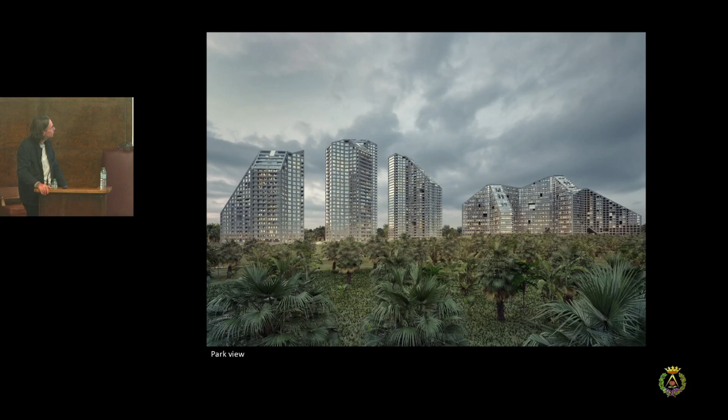So we divided the idea, we chopped it up into towers. Then nothing happened. We got a call again from the son, like, could you start again? We'd like to have a new idea, we'd like to make a second version of the building. It's more or less the same, but it should be different.

Of course, new generation. But we'd like to have some ideas from the previous building, like the collective spaces, but they have to be a little bit bigger. We don't want a roof terrace anymore, but we have to have something on the plinth because the parking doesn't look nice. So that was how it started.

In the meantime, the whole development was growing. It was really an urban density, like 10,000 people living in this development. So we thought, okay, let's combine this old and new. We call it the weaving tower, having this kind of almost weaving of spaces, a weaving of functions, based on the basket strategy.

But again, make it super efficient. Our client is a commercial client, but also has a certain spiritual touch, and it has to work, fit to all the regulations, fit to the market. We knew a little bit how it worked, but it was still an exciting challenge. For this, it was super good that we had Prajakta on board, who was trained here.

So you could see that it has many ideas from previous projects, like the Celosia building or the Mirador, also the previous Indian example, but it's a rationalized version. It's 100,000 square meters again, excluding the parking. I'll explain a little bit how it's built up.

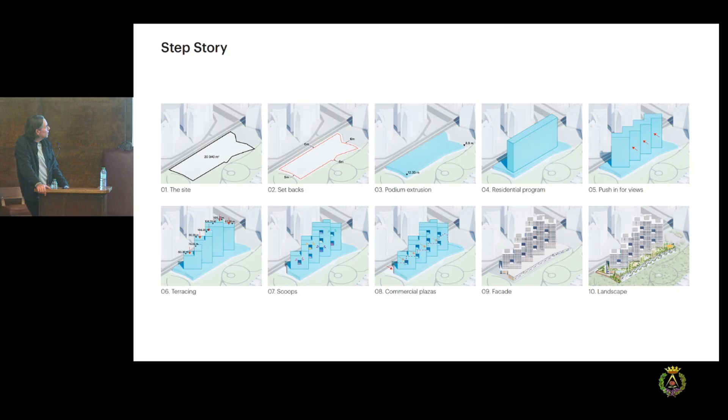So it's standing again next to the park and has this kind of collective skyline of the whole neighborhood.

We don't start construction until next year, but here you see the montage of the two buildings. The urban side, the pipeline streets, is more commercial on the ground floor—that was one demand from them. On the park side, they wanted a more activated plinth, so there's residential on the park side in the form of townhouses, shown in red.

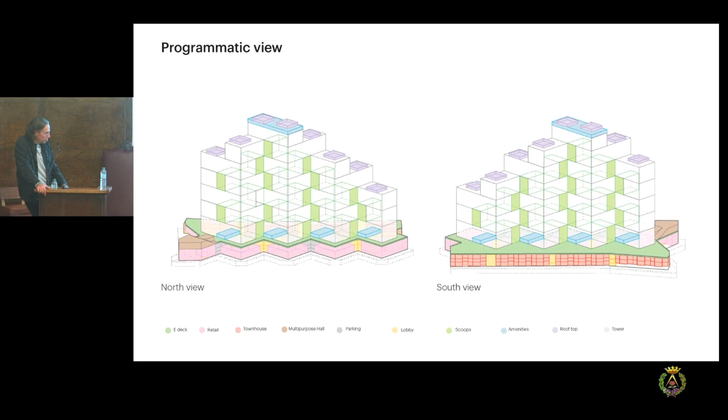Then there's what we call the amenity deck, the E-deck, where all the collective outdoor spaces are. These are the park apartments—they replace the terraces from the previous building. These are the high-end units, around 300 square meters, a luxury part of the building. But the bulk should be an efficient collection of standard units built on this zigzag weaving pattern.

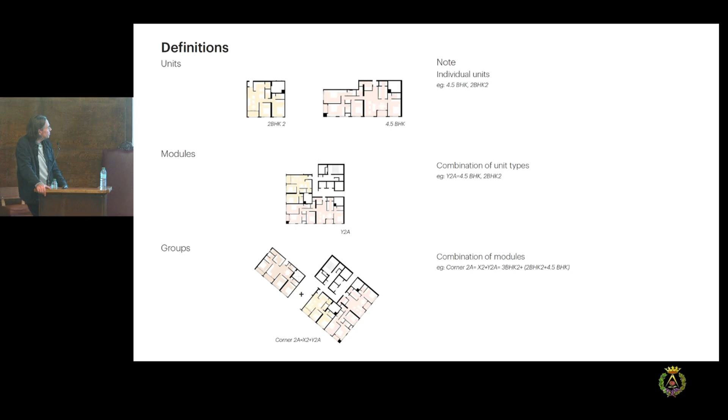We optimized it by having all the standard floor plans more or less the same as in the previous building, and we pre-combined them into modules—optimal combinations of 2 units next to the core. These modules became groups placed at certain spots. These were the building blocks we developed piece by piece, and like Lego, we put the building together.

Here you have all the plans, and again the Indian floor plans show how you come into the building. They don't like corridors—you need an efficient organization where the bedrooms are more apart, with a certain number of bathrooms, little prayer corners, ventilation issues, and so on.

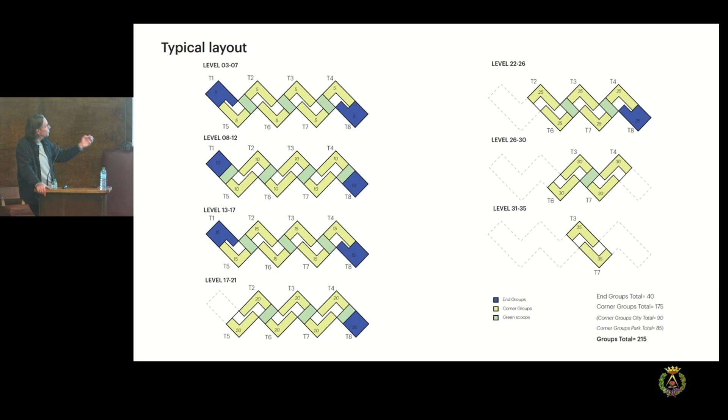These are combined into groups, the modules into groups, and with these elements we click them together into the facade, into the system. So this is how we optimize the structure, all the pipes, and in a way it's an improved version of the previous project.

What we improved as well was the scale of the outdoor spaces in between—they became much bigger. And here you see again the mix. In the end, a bit fewer units, but overall, again, a huge building.

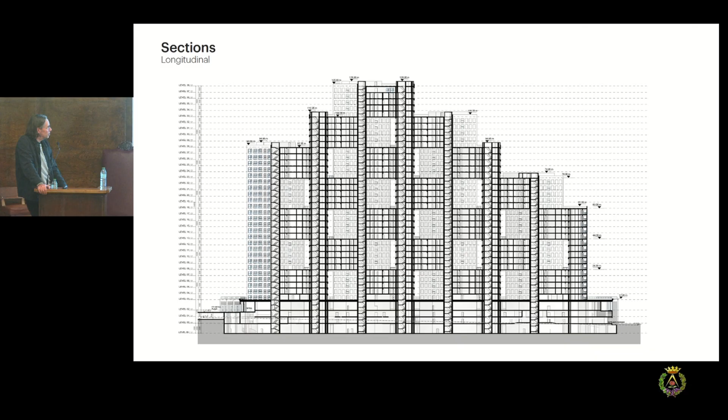Again, with a lot of additional amenities that you wouldn't normally have in a collective housing project. It has padel, a pool, a sand pit—whatever you name it, it has it. These are on the outdoor deck, on the first floors in the podium, and at the base of the tower.

Some ideas for the gardens—we designed them a little bit more. Basically, we have four layouts that will be developed into the project, so everybody has a kind of sub-neighborhood within the building. That's the story.

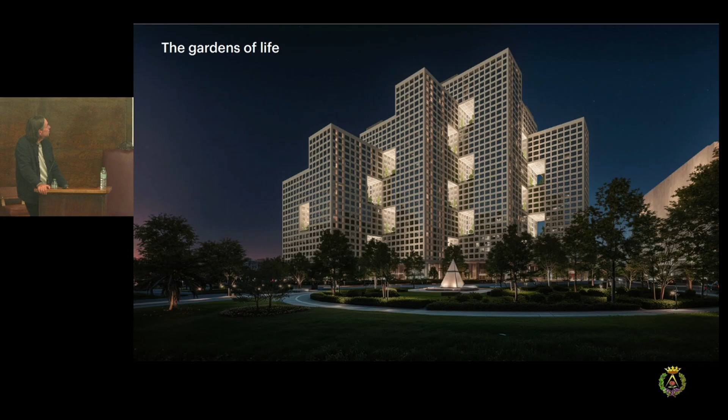She used to work for us. She was also part of the booklet that's now on our website. She started to become more of an activist, so she left us and started working on her platform Woonopgave, a platform for the construction of houses, trying to find ways to fix the housing crisis.